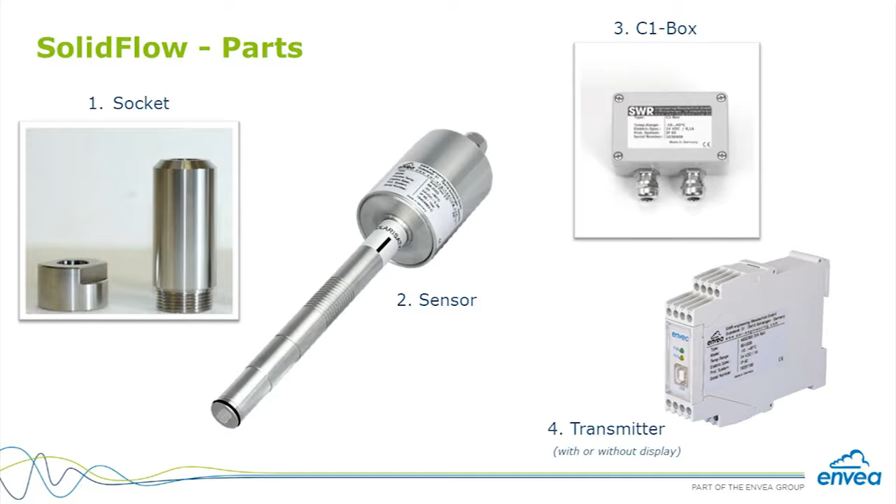The very first product we're going to talk about is the SolidFlow. The SolidFlow is a mass flow meter for bulk solid materials. It works with microwave technology, counting every single particle which passes by the sensor. It creates a microwave field inside metallic pipes, so metallic pipes are always required. And it measures using the Doppler effect, counting the particles' reflections.

The sensor can be used in two situations: free-fall applications and pneumatic conveyance systems. What is very important is to keep the diluted phase - the particles should be very well diluted inside. The sensor is not intrusive. There are no moving parts, nothing to break or wear over time.

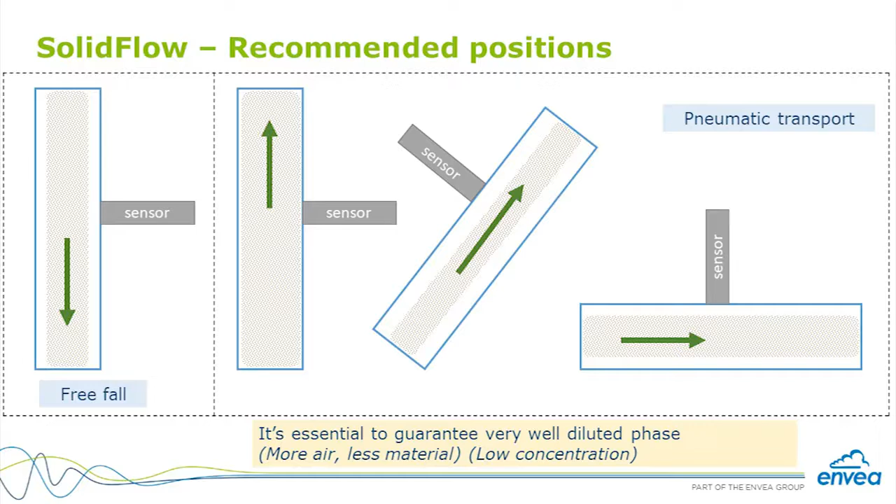SolidFlow should always be installed after a conveying device. Having a good conveying device helps us have a good measuring application. The sensor works well in small flow conditions and bigger flow conditions, going all the way to 20 tons an hour. And the installation is quite simple.

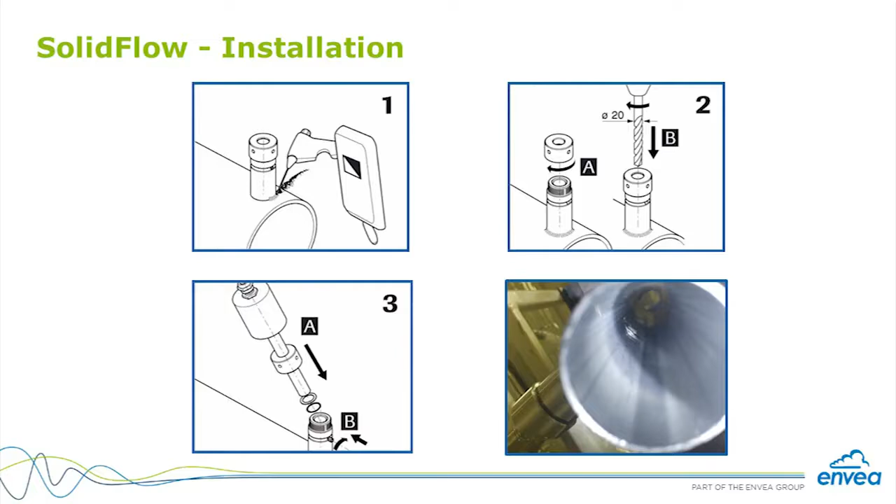It's basically welding the weld-on socket into the pipe, drilling a hole through the weld-on socket, and inserting the sensor. And that's all. The sensor sends a signal to the evaluation unit, and from the evaluation unit we can get Modbus, Profibus, 4-20 mA directly to your PLC.

The SolidFlow is a quite compact device, and one thing that makes it even better is the ability to understand the flow inside the pipeline using a very advanced algorithm. With this technology, the sensor can predict the flow inside, delivering a better and more accurate measurement.

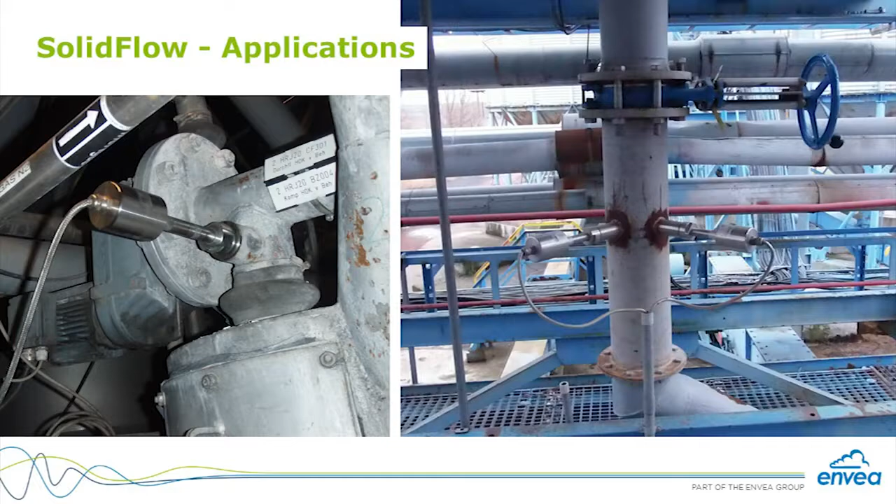The SolidFlow can be used in a big variety of applications, such as coal, cement, limestone, spices, additives, flour, and the list goes on. Just find a good conveying device, free-fall or pneumatic application, mixing process, feeding process, and then you get an online flow measurement. Easy to install, compact, and reliable.

And now let's jump to the big brother, the MaxxFlow. The MaxxFlow is a mass flow measuring device for bigger range applications, going even up to 250 tons an hour, 300 tons an hour, but respecting the concentration inside to have a safe application.

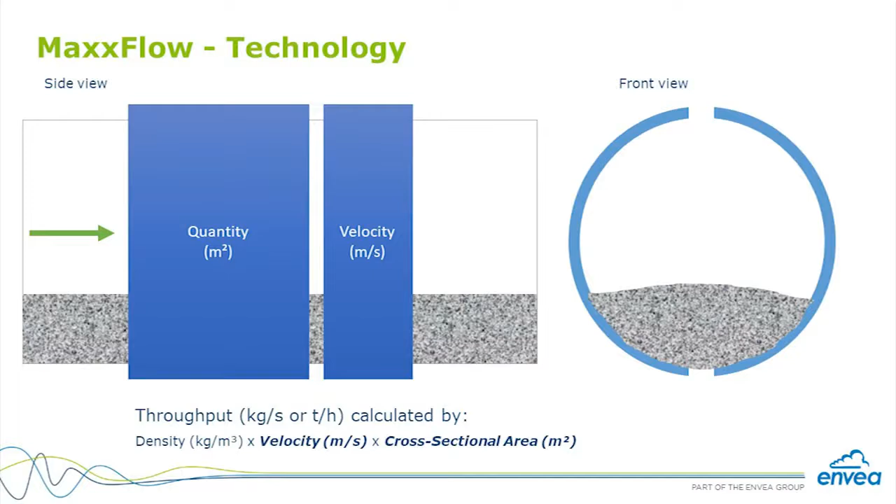Inside the sensor, there are two main measurements happening: density and velocity. Using the cross-section information, we can calculate the mass flow. What makes the MaxxFlow different from the SolidFlow is its form factor. The sensor is now part of the pipeline with a fixed diameter, but internally it has a ceramic inlay, keeping the sensor resistant against abrasion and wear.

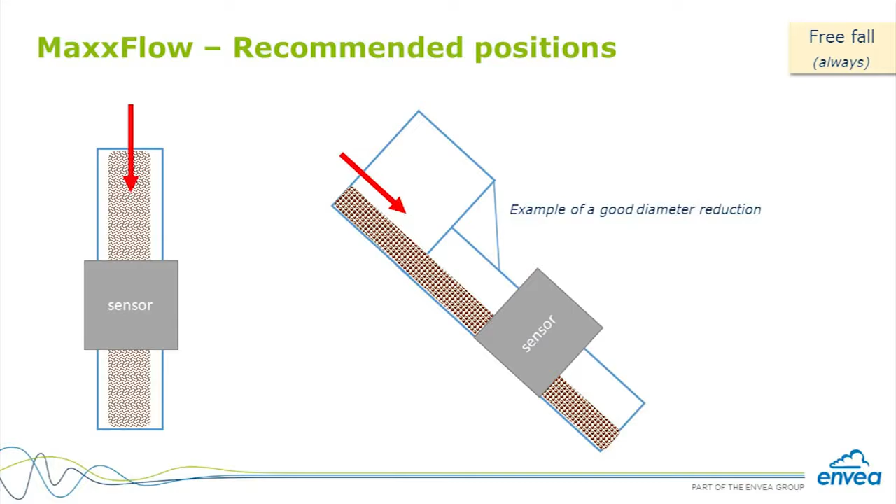Another thing - the MaxxFlow should be used only in free-fall applications, no more pneumatic applications. To get a good measurement, the sensor requires a good concentration inside. The material flow should fill the sensor to have a higher signal and better accuracy. Vertical lines, inclined lines are well accepted.

And just between us here, the MaxxFlow is the best replacement for the old impact plate meters. The MaxxFlow is easier to calibrate. It is stable over time. There are no moving parts, no mechanical parts to break. There are no problems with dust or abrasion. And calibration is so much easier to do.

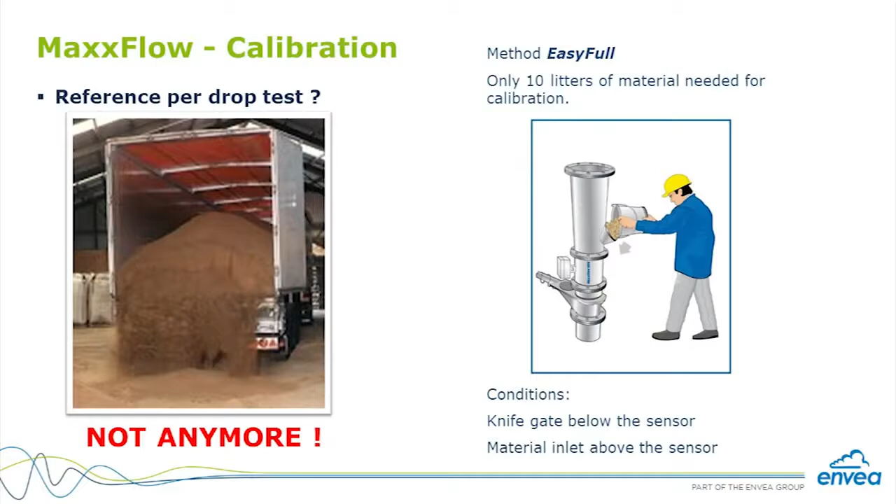And you can have MaxxFlow measuring cement, gypsum, flour, and many other materials. In addition to it, we can make sure we are always injecting material into the process.

Different lines, different lances - do you remember about the PCI application? We can have FlowJams around the oven as well. We can have FlowJams in between two screw feeders. But what is a FlowJam?

Let's talk about it. The FlowJam works with microwave technology, using the Doppler effect again. Is it like the SolidFlow? Sort of, but now targeting just flow detection. It has the same Doppler effect technology, but it gives you just one alarm, just to inform that the material is flowing.

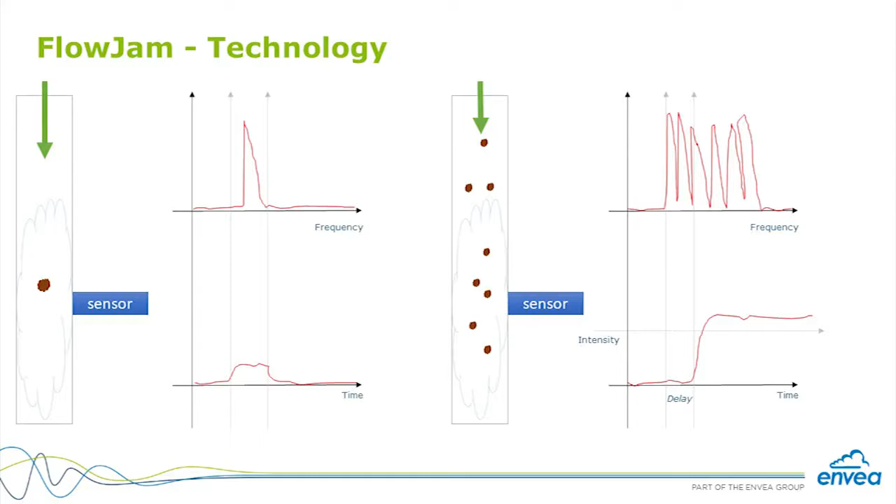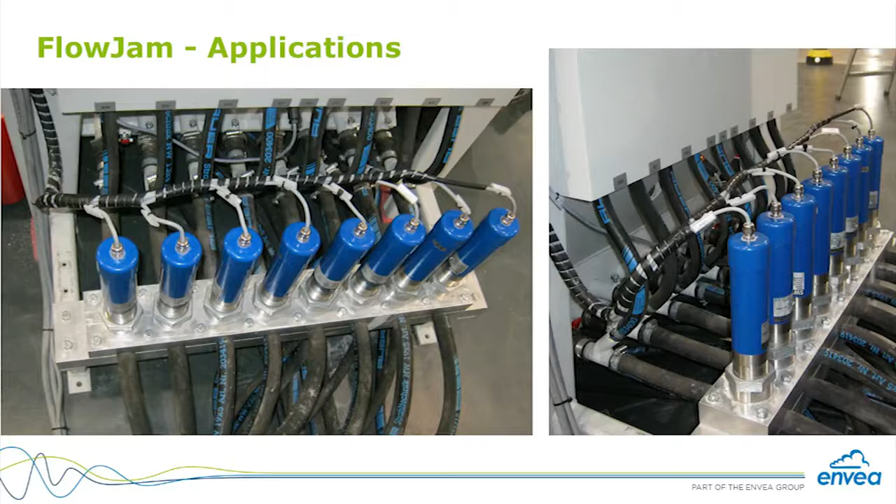Similar to the SolidFlow, FlowJam can work in two different applications, pneumatic again and free fall, but with less restrictions. It goes in vertical lines, inclined lines. We just have to make sure the material is flowing inside. Then FlowJam is ready to detect.

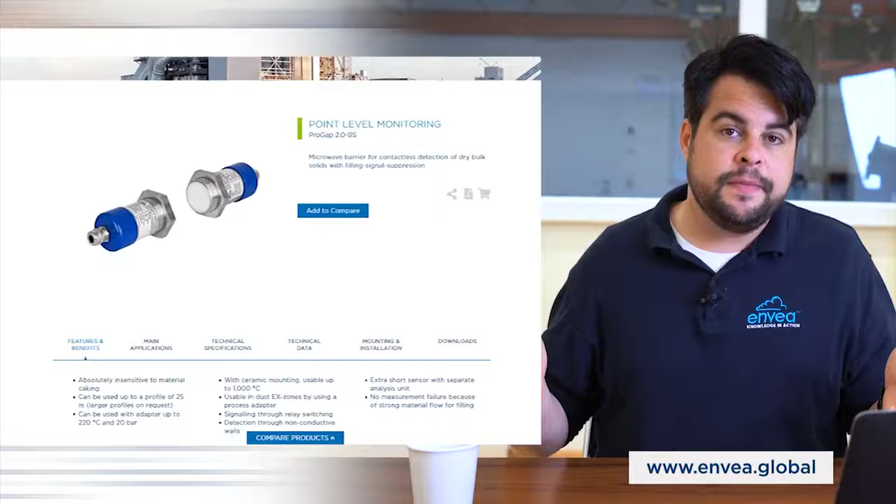For chute and silo monitoring, we have the ProGap. The ProGap has transmitter and receiver. ProGap works with the microwave technology. Using sensor and transmitter, the distance between them can be up to 25 meters, covering very large diameters.

ProGap is very versatile because it uses the same process adapters as a FlowJam. It goes in high temperature, high pressure, food applications, and more. For chute monitoring, the mine industry used to install those rotary sensors for flow-no flow monitoring. But those sensors used to break quite easily and quite often.

Having a contactless material detection, we avoid breaking the sensor. So ProGap is basically a one-time purchase. And for silo level monitoring, ProGap has the same advantages compared to the old rotary plate sensors. It doesn't break over time, it doesn't clog, it's a contactless monitoring. Once installed, it just works.

And now we can talk about moisture. Material moisture measurement, not ambient moisture, but material moisture. Something that was done previously only in the laboratory using those old thermal scales. We're now bringing the moisture measurement from the lab, something that was only done once every hour. We're now doing it every second using the M-Sens.

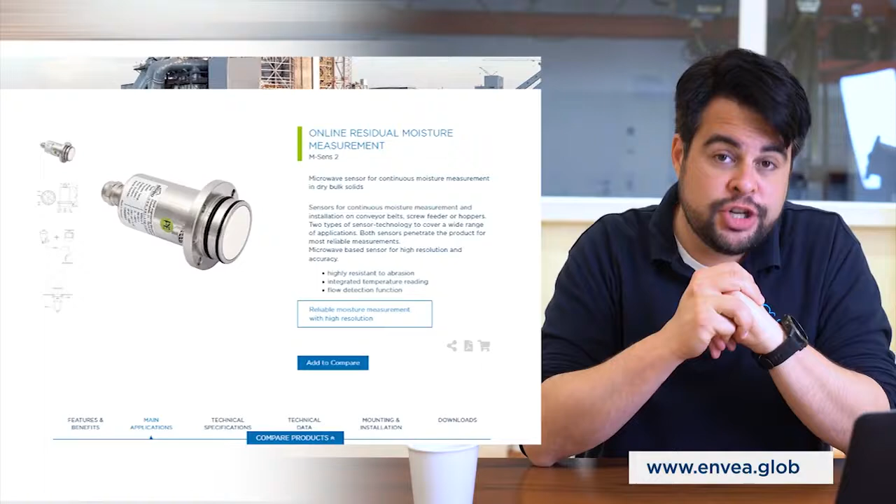The M-Sens works with a high-frequency contact-based measurement. The material should be always moving, always renewing on top of the sensor. We don't want gaps in between material and sensor. They should be always in contact.

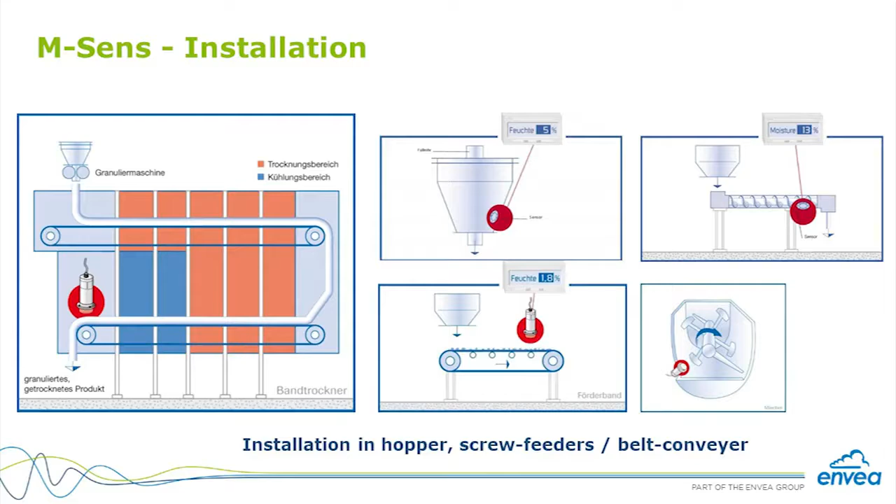The M-Sens is a very compact sensor which should be installed always in conveying devices, always in points where the material is moving, such as conveyor belts, on top of conveyor belts, underneath screw feeders, closer to dryers or even inside the dryer, and hoppers. And once again, we just have to make sure we have a stable flow and a stable material layer on top or underneath the sensor.

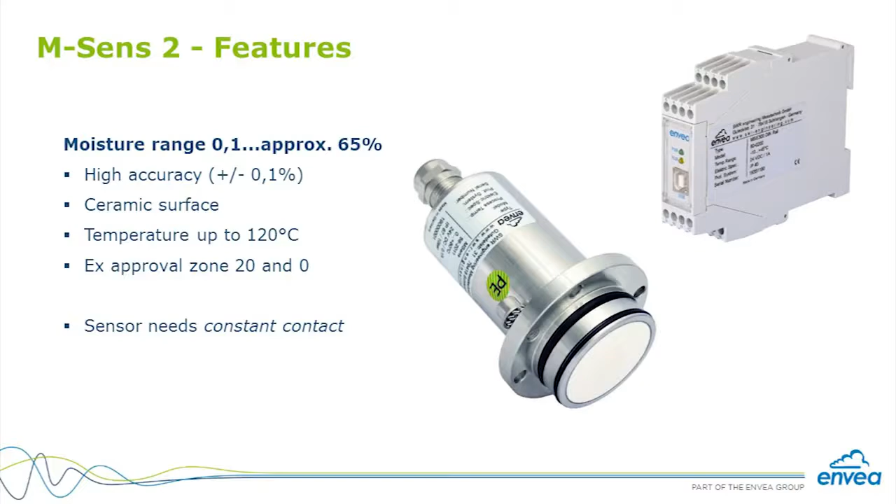With this information in hand, we can have M-Sens measuring organic materials, minerals, pulverized, granulate, wood chips, pellets, and much more. The M-Sens family has three different sensors. M-Sens 3 for moisture and temperature information, so two analog outputs. Once again, 4-20 output, Modbus, Profibus. The M-Sens 2 doing only moisture measurement, and the M-Sens WR for wide range applications, only with moisture measurement.

In every application where moisture matters, M-Sens is the right way to go. It's compact, affordable, and easy to calibrate. As you may know, Envea has the entire portfolio for emissions measurement. But in this video, I want to share with you just the entry level for bag filter monitoring.

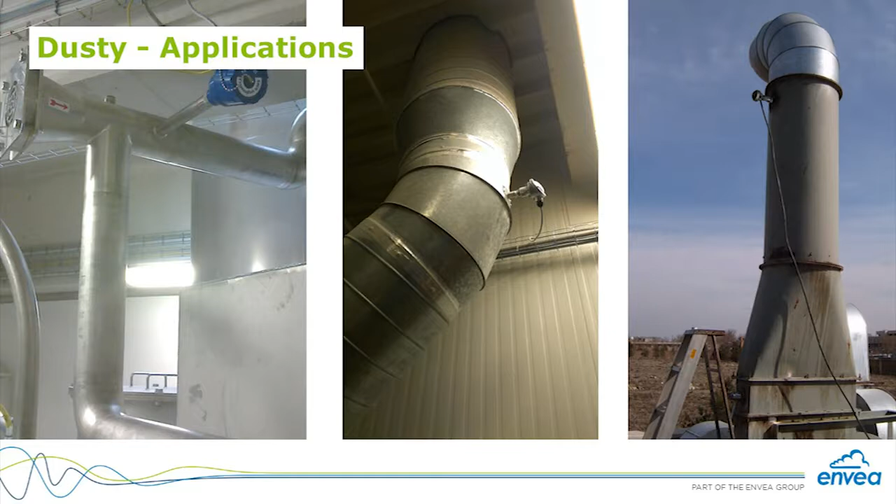Let's begin with Dusty. Dusty is basically a plug-and-play device. You install it after a bag filter on the clean gas side. As soon as you have a broken bag, a higher material amount flows to the chimney stack, and using the electrodynamic technology, Dusty detects the high material volume and gives an alarm telling there is a broken bag inside. Dusty is an affordable device, compact and very easy to adjust.

But Dusty is just the first step into the emissions measuring range. And what should we do when we want more than just an alarm? When we want measurement in milligram per cubic meter? Then we jump to the ProSens. The ProSens uses Envea's electrodynamic technology, monitoring everything that happens inside the pipeline. The sensor goes on the chimney and it has an external evaluation unit to deliver 4-20, Modbus and Profibus outputs.

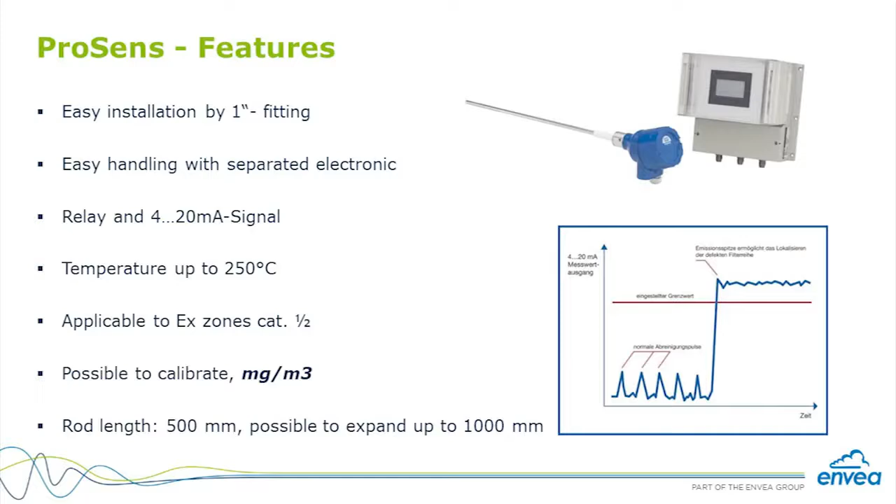Using the isokinetic sampling or dosing method, the ProSens can be calibrated, giving an accurate measurement in milligram per cubic meter. And it goes from 4-20 output, Modbus communication, Profibus, directly to your PLC.

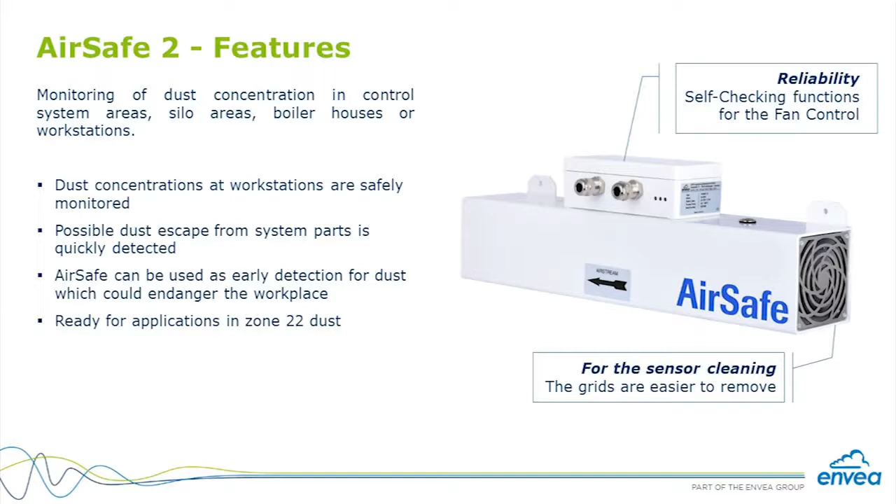And we have adapted the same electrodynamic technology to a more compact device, the Airsafe II. The Airsafe II is an ambient air particulate concentration monitoring device. With this longer description, basically what Airsafe II does is monitor the amount of particulate in rooms, storage areas, and outside, just to make sure that those concentration levels are below an important alarm level.

Yeah, that's the end of our chat. So if you have any further questions regarding material flow measurement, material flow-no flow detection, material moisture measurement, emissions measurement, I'm quite sure there's someone from Envea next to you.